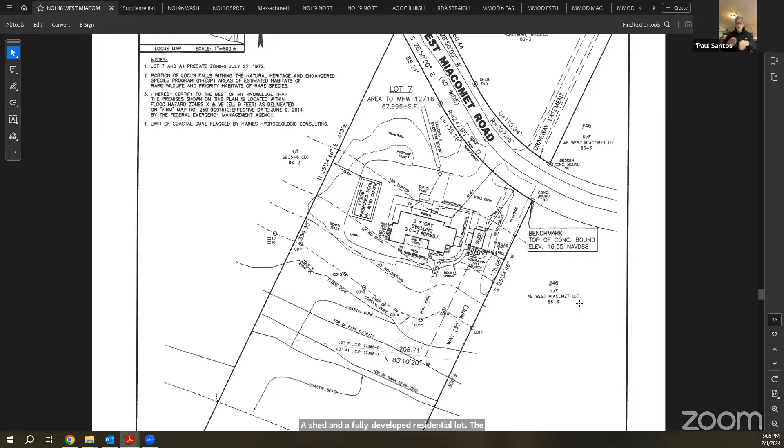The subject property is located on the south side of West Miacomet Road. The site is approximately 67,996 square feet, consisting of a primary dwelling, a shed, and a fully developed residential lot. The surrounding land use is residential. The Massachusetts Natural Heritage Atlas, the 15th edition dated August 1st, 2021, shows that priority habitat and estimated habitat is mapped within the property, but does not cover the proposed pool location. The proposed work does not require a filing with MESA.

The plan before you lays out the lot itself. You'll see West Miacomet Road to the north, and the Atlantic Ocean to the south. Working from the ocean to the proposed pool site, we have the land under the ocean, a coastal beach, then a coastal dune, and from there our 25-foot no disturb zone and 50-foot no build zone.

The pool itself is located within an area that is currently a developed lawn. This house was moved some years back with permits from this commission and from NHESP, and the existing dwelling location, hardscape, the shell drive, and the lawn area were permitted as part of that original submittal.

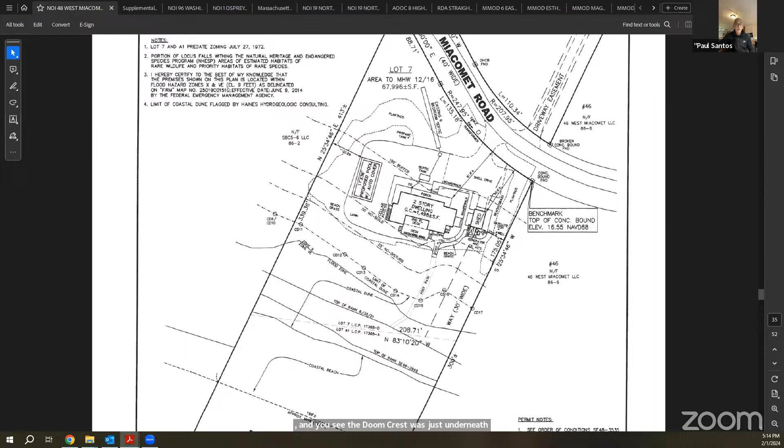There was a slight change in the dune crest between the 9th and the 24th, but as of today the measurement from the top of the dune crest to the proposed pool location is still in excess of 100 feet. If you notice on the plan, you can see the existing stair platform, and the dune crest was just underneath or adjacent to that platform, which mimics somewhat what that picture shows.

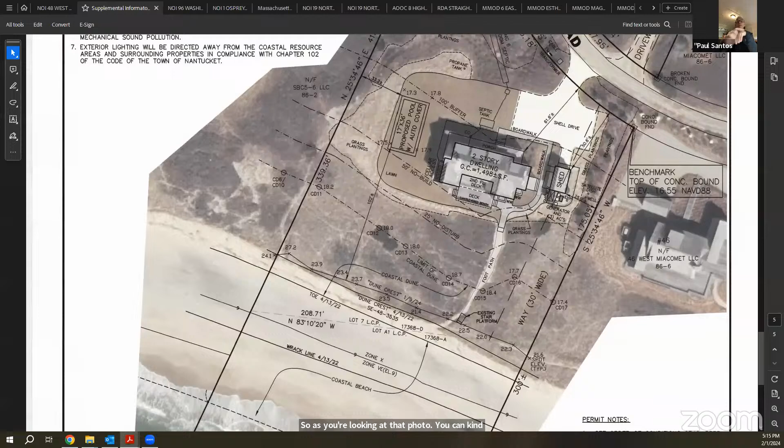So the dune crest line on the 9th was done after a few storm events that did change the dune crest location. As you look at that photo, you can see the actual dune itself was about 45 feet. There's almost a shaded area, a clump of vegetation, which is where the actual toe of the base of the dune is landward.

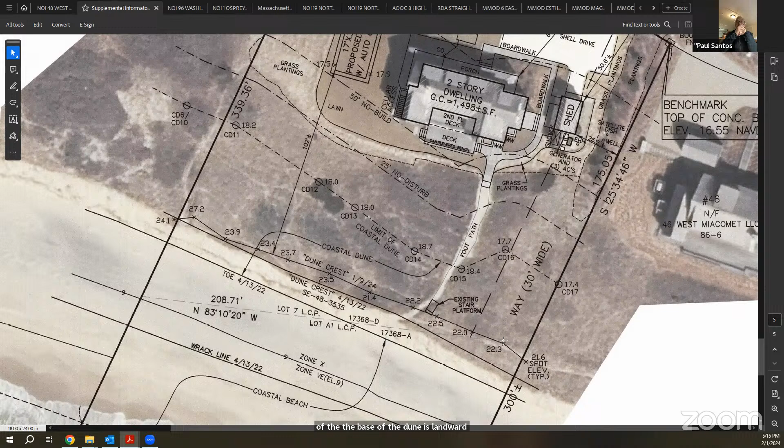Thank you, Paul. Seth, do you have a follow-up question? Yeah, this is a complex landform there. The dune crest and the coastal bank overlap with each other — am I correct in reading that from the plan? And is this an actively eroding coastal bank, or is it just considered a coastal dune and we're not worrying about the coastal bank?

Brian Madden's on the call too, Seth, if we need further explanation, but I think I can explain this. It's not a coastal bank, it's a coastal dune — a coastal dune that goes into a coastal beach. So there is no coast, you can't have the dune and the coastal bank at the same time. So basically the landform is a coastal dune.

So when we talk about an eroding coastal bank, there are no provisions for an eroding coastal dune, but there are provisions for an eroding coastal beach, which you do have. But in this case the coastal beach is seaward of the dune crest — it's actually at the toe of the dune crest. So when you look at the erosion, or 20 times the erosion rate, in this case it would actually be measured from the coastal beach, not the dune crest.

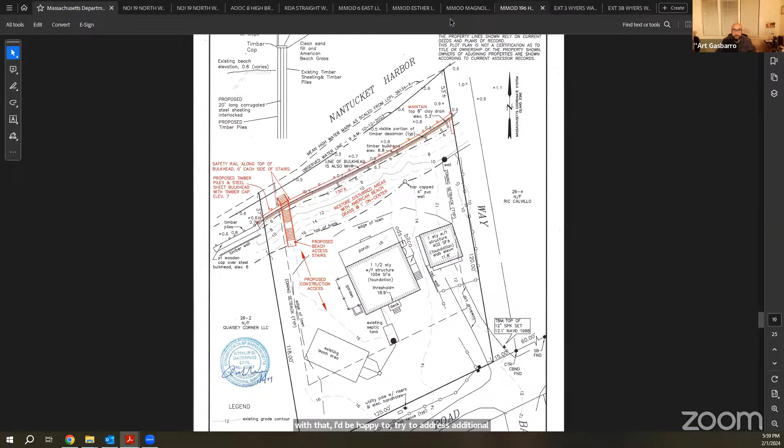Thank you, Art. Comments from commissioners? Yes, Seth. Thank you, Mr. Chair. I know I've been vocal about bulkheads in the past, but that's not my comment today.

My comment is that the last time, or one of the last times, we had a bulkhead application come in, it was for FRP sheet rather than steel. Since then, I did a lot of research on FRP and its potential benefits. It seems, although I'm not an engineer and don't claim to be one, that it has a much better strength-to-weight ratio than steel and lasts longer in a marine environment. It's the goal of the commission to put in projects that require less maintenance over time and less disturbance. So I was wondering if the applicant here would consider FRP sheet rather than steel sheet.

Through you, Mr. Chairman, I certainly will investigate that further and discuss it with both the contractor and the owner and see what we can come up with.

Thank you, Art. Any further questions? So I assume, Art, that the house was built in 1999, according to the property records. So certainly no statutory protection involved. And so I assume the wooden bulkhead was there to protect the house that was there previously. Am I correct? Yeah, I believe this house was subject to a fire and the house had previously existed.

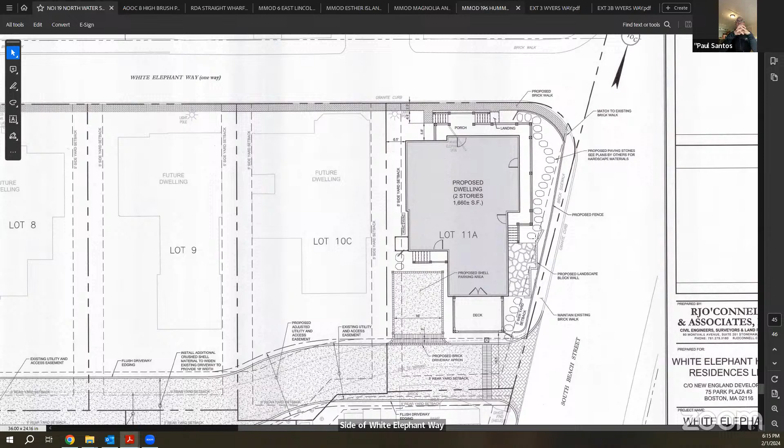Once again, this is lot 11A on a subdivision that was approved and endorsed by the Nantucket Planning Board on August 14th of 2017. This lot is located on the south side of White Elephant Way. Again, the site itself is in a flood zone, being flood zone AE elevation 8. Elevation of South Beach Street is approximately elevation 3. This site rises from elevation 3 to about elevation 5, so it's a little bit lower than lot 7 previously discussed.

The building is shown shaded. It is a 1,660 square foot footprint, which would be constructed on a concrete foundation with appropriate flood vents. The system would be constructed with a helical pile base underneath the footings due to groundwater material and so forth. Once again, this building would be tied to public water, public sewer, and the roof drain and all the drainage will be tied into the existing drainage system.

Access to the site would be from an internal driveway, similar to lot 11, but it would be fronting, if you would, on White Elephant Way. This one is right at the corner of South Beach and White Elephant Way. Again, happy to answer any questions that you may have.

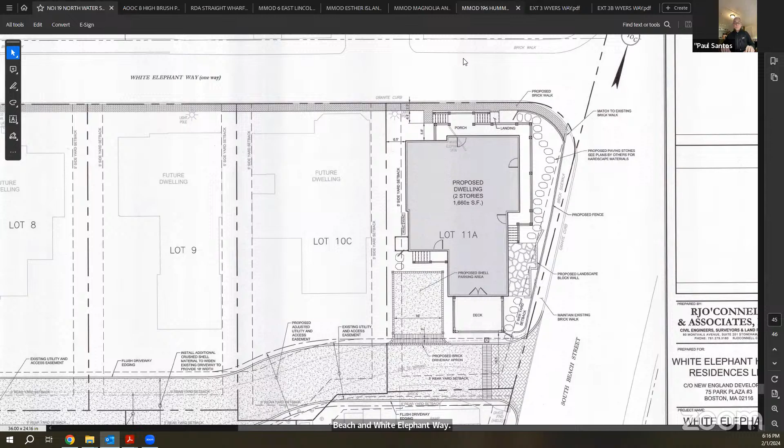Thank you, Paul. Any questions from commissioners? Seeing none, I take it you'd be happy to close, Paul? Yes, I do have a DEP file number for this lot also, and we would like to.

Excellent. A motion to close by Mark Beal and seconded by Joe Plandowski. By roll call vote: Mark Beal, aye. Tim Brain, aye. Seth Engelbourg, aye. Joe Plandowski, aye. Linda Williams, aye. Ian Golding, aye. Thank you, Paul. Thank you.

So that brings us on to amended orders of conditions: 8 High Brush Path LLC, 8 High Brush Path. And Brian Madden... Joe, sorry, Brian, can you just, Joe has put his hand up, I believe. Is there? It didn't belong there. Sorry to interrupt you, Brian. Please go ahead. No worries. Thank you. Brian Madden from LEC Environmental Consultants.

The amendment request before you is to modify the approved crawl space foundation to a full foundation for the garage addition, which is adjacent to the loop driveway. So the garage addition is at the closest point 85 feet away from the bordering vegetated wetlands to the northeast. You can see the 100-foot buffer zone straddles through the middle portion of the structure, so half of it's within the 100-foot, the other half's outside.

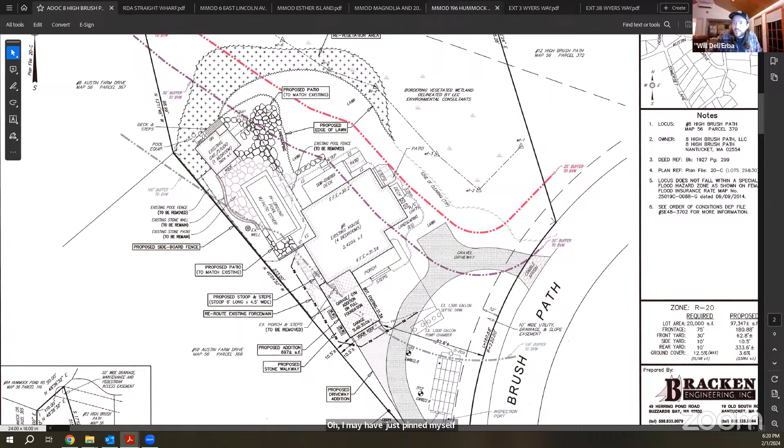And Will, I don't know if you're able to pull that up easily. I was going to talk you through it. Oh, I may have just pinned myself by mistake, hitting too many buttons. No worries, Brian, I was just responding to an email. What was that you were looking for? Oh yeah, just the next sheet down. I just wanted to pull that up.

Appreciate it, thank you. So this is the building section that just gives you a little profile of the foundation. The bottom of the footing there you can see is at 21.33 with a 12-inch deep footing, and the basement floor elevation is at 22.67 with a 4-inch thick slab at the basement.

So the intrusion into high groundwater is approximately 18 inches, a little less than 18 inches actually. 12 inches of that is the perimeter 12-inch deep footing. So the actual intrusion into high groundwater is very minimal associated with the basement. And again, that's a seasonal high within coarse sand.

As proposed, there's going to be no permanent dewatering or need for that. Again, it's a waterproof foundation. And we believe that it's not going to have an adverse effect on groundwater. Again, this is minimally within the 100-foot buffer zone, pretty far set back. But we are requesting the waiver for no adverse effect. And with that, I'll turn over to questions.

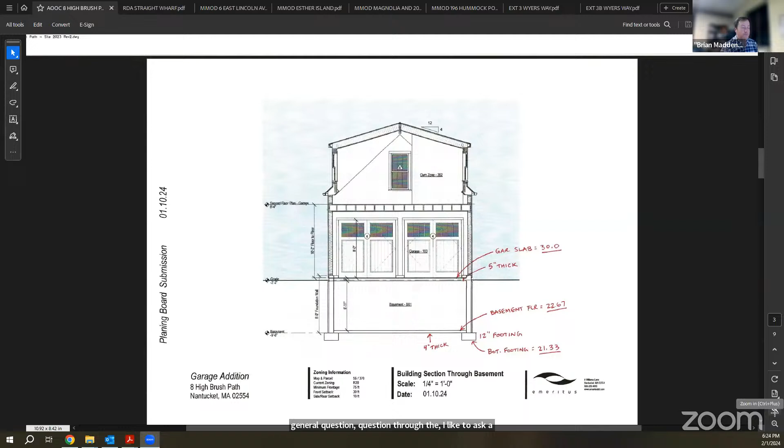Brian? Thank you all. Will, if you don't mind just putting up that building section, I'd like to ask a general question through the chair, when we're reviewing this, trying to sharpen the pencil. So the basement floor is at 22.67. Again, high groundwater's been documented at 22.8. If we were able to raise the basement floor elevation above that 22.8, and we only had the perimeter 12-inch footing, is that something that the commission would consider? I'll ask the question. Appreciate any responses if you're able.

So let me get this straight. You're saying, how high are you planning? Are you suggesting you raise it beyond the current drawing? So it would take the full basement outside of above high groundwater. So there would be a minimal intrusion into high groundwater for the 12-inch perimeter footing, but not the basement structure itself. And again, that goes around the perimeter. And so you avoid that larger displacement into high groundwater.

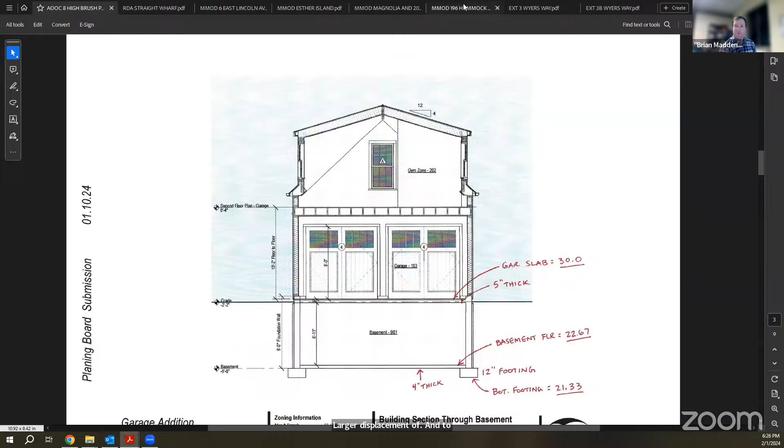Comments from commissioners? Linda, I see your hand up. I'd consider that. Thank you, Linda. Seth? Thank you, Mr. Chair.

My personal opinion is that the actual footing should be at least at or above the groundwater elevation. I think that having the true basement above the groundwater elevation is a positive improvement over having it in the groundwater, but I don't think it mitigates the fact that there's still adverse impacts from the footing. Thank you. Thank you, Seth.

Mark? I think we've gone a little beyond what our role is, to sit here and redesign the garage addition basement. I think the application as submitted probably is insufficient. I think we should send the applicant back to the drawing board and come back with a plan that is more approvable by us. Well, that sums it up, I would say, Brian.

No, again, thank you all for the feedback. This is good insight. So I will request a continuance to the 15th. Okay, to February the 15th? Yes, please. And just, Ian?

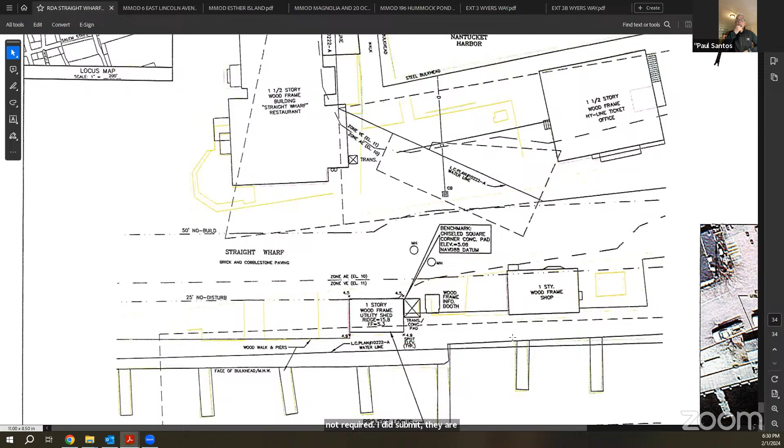The construction of the dormer is located above and outside of the floodplain. There'll be no direct or indirect impacts to any wetland resource areas. Therefore, it is our opinion that a notice of intent is not required. I did submit, they are currently before the HDC. And Will, do you have the actual building elevation that may shed some light on what we're doing here?

Sorry Paul, through you Ian, is that in this submission, or was that a separate? It was a separate that we had sent to Lisa. Let me just take... And if you don't have it, I can kind of walk you through, it's pretty straightforward. Let me keep looking, but I don't have it in my folder, but I may have it in my email.

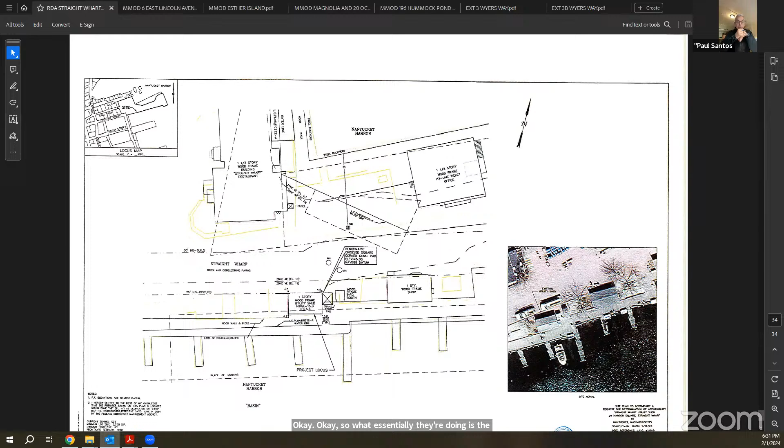So essentially what they're doing is the shed stays as it is. They're going to go internally and raise the utility equipment to get it up, not completely out of the flood zone, but to a spot where the wiring inspector is more comfortable with it. And then in order to make required clearances and so forth for the utility equipment, the intent is they have to create that small dormer. You'll see it right there, the 3 windows and the small dormer. That's actually facing the wharf. That is a requirement to maintain the mechanical separation distances from the structure to the utilities within the existing shed. So that's the extent of the work.

We filed it as an RDA. Majority of the work is happening within the confines of the shed, and then the small work on the roof itself. I'm happy to answer any questions that the board may have.

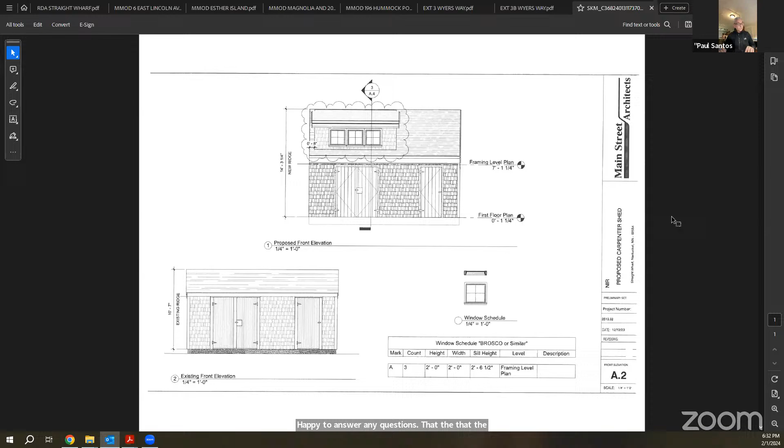Thank you, Paul. Any questions from commissioners? Paul, do you have a staff recommendation? I mean, sorry, Will, do you have a staff recommendation? Yes. We were recommending a negative 3, approving them to do the work. There's no adverse impact to the resource area.

Great. So a motion to approve this request for determination of applicability. Thank you, Joe. Seconded by Tim. By roll call vote: Mark Beal, aye. Tim Brain, aye. Seth Engelbourg, aye. Joe Pandowski, aye. Linda Williams, aye. Ian Golding, aye. Thank you, Paul.

Thank you, everyone. So that brings us on to minor mods. Jones, 6 East Lincoln Avenue. Who do we have? I don't see anyone jumping in here. Someone should be on for this. It says Blackwell on the agenda, but if there's nobody here, I'm guessing we should continue it to the next meeting. All right, we'll certainly continue it, put it at the bottom of the list in case someone appears.

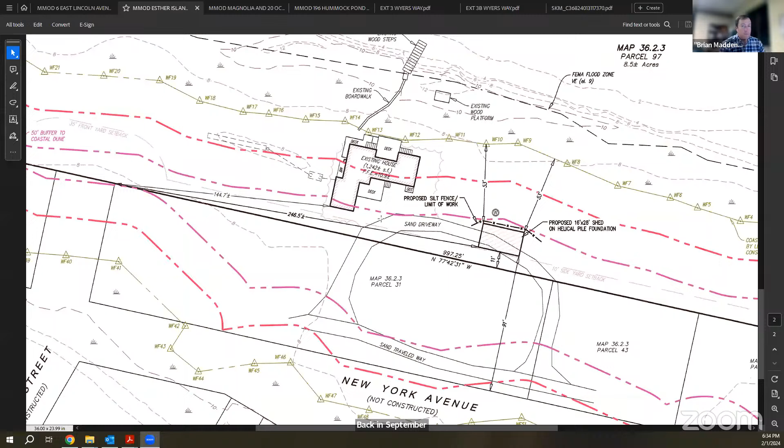The applicant had received some clarification from the Zoning Board of Appeals staff on zoning setbacks, and what is being applied is a 10-foot setback, which enabled the structure to move further to the south, away from the resource area.

The increased setback has been moved. It was at the 50-foot buffer zone as approved; now it's at 53 feet. The revision has also enabled all work to be located outside the 50-foot buffer zone to the coastal dune. As you can see, the shed overlaps with the existing sand driveway, so there's no further encroachment or alteration to natural vegetation out there. The shed will continue to be elevated on a helical pile foundation, and as proposed, it's an improvement over what was previously approved.

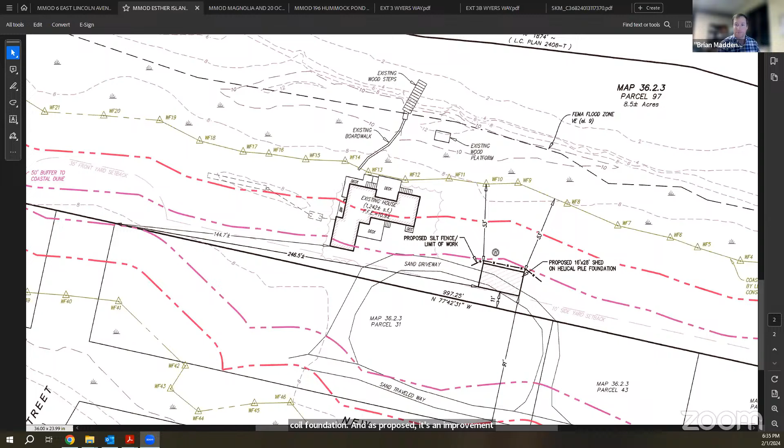Now, turn over to questions. Questions from commissioners?

What's happening to the driveway? Well, it's a loop driveway, so they're just basically going to abandon the easterly end of it.

Any observations from anyone? So a motion to approve this minor mod.

Thank you, Mark. Thank you, Joe. By roll call vote: Mark Beal, aye. Tim Brain, aye. Seth Engelbourg, aye. Joe Pandowski, aye. Linda Williams... Linda? Linda is temporarily... aye. Thank you, Linda. Ian Golding, aye. Great, thank you, Brian.

This brings us on to Nantucket Islands Land Bank, Magnolia Avenue and 20 Ocean Avenue.

Good evening, Rachel. Good evening, how are you? Thank you very much for hearing this tonight.

My name is Rachel Freeman. I'm representing the Nantucket Islands Land Bank here with a minor modification to the design of our stairs at the end of Magnolia Ave. Originally, the design included a mid-center landing, and we're requesting to remove that, as well as switch from helical piers to sonotubes, because installation of the helical piers would require machinery that could be extensively disturbing to the bank. We feel this is a more environmentally friendly way of going about it. I'm happy to answer any questions if anyone has any.

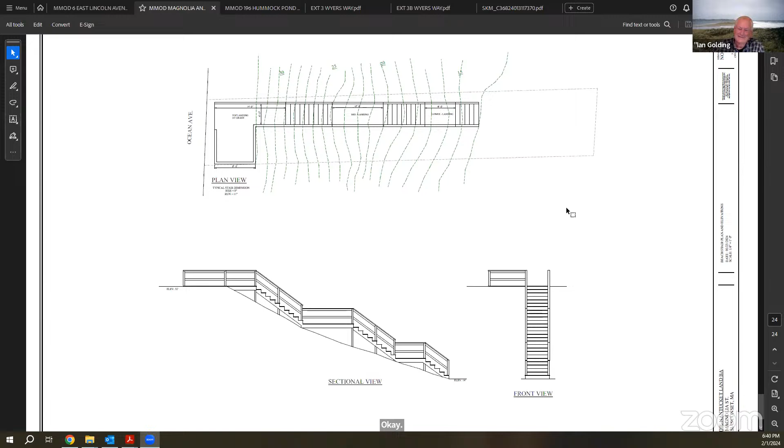Okay, so a motion to approve this minor mod.

Thank you, Tim. Thank you, Joe. By roll call vote: Mark Beal, aye. Tim Brain, aye. Seth Engelbourg, aye. Joe Plandowski, aye. Linda Williams, aye. Ian Golding, aye. Thank you very much, Rachel.

That brings us on to 196 Hummock Pond Road, LLC, 196 Hummock Pond Road.

David Haines, good evening, sir. Good evening, how are you all doing? It's a long night for all of us.

This is a minor mod request at 196 Hummock Pond Road. There's been a few minor changes, some omissions or changes.

Yeah, I gotta get my tongue straight. Excuse me. We're asking for 3 additions and 3 removals.

First of all, the garage has been reduced in size, slid slightly closer to the 50 foot line, but still outside of it. It's been reduced from about 1,000 square feet to 400 and something square feet. There was also a pea stone patio on the southeast side of that which extended inside of 50 feet, and that has been eliminated.

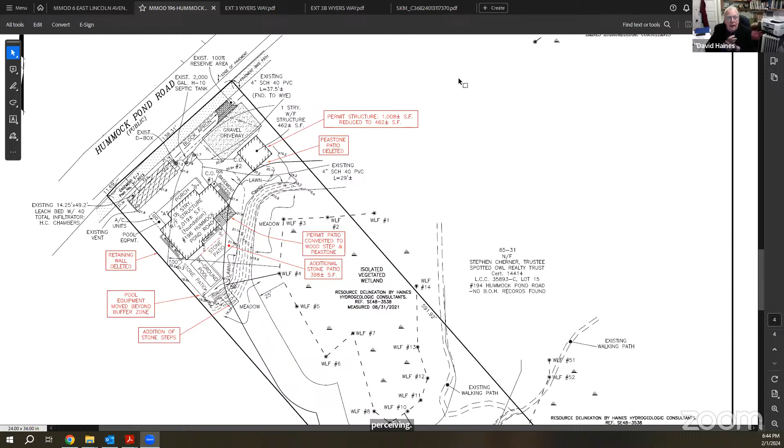So a few minor things, tweaking and adjustments, all meeting the performance standards, all within the original limit of work. Some things have been eliminated, some added, just small tweaking. With that, no adverse impact, the site is stable, and everything is proceeding. If you have any questions, I'd be happy to answer them.

Any questions from commissioners? Seeing none, a motion to approve this minor mod, please. Seconded. By roll call vote: Mark Beal, aye. Tim Brain, aye. Seth Engelbourg, aye. Joe Pandowski, aye. Linda Williams, aye. Ian Golding, aye. Thank you, David. Enjoy your evening.

The minor mod, Jones, 6 East Lincoln Avenue, is going to be continued until February 15th. So there are no certificates of compliance, and that brings us on to orders of condition. The first one is, I believe, the Great Harbor Yacht Club, 96 Washington Street.

Ian, sorry to interrupt, we skipped something. We have 2 extensions of orders. They were listed after orders of conditions. Would you like to take them first? Oh, I lied, that's my fault, ignore me please. Also, Mr. Chairman, Jeff is away in Vermont on the one on Jones, 6 East Lincoln, so they asked to have it continued. Great, thank you, Linda.